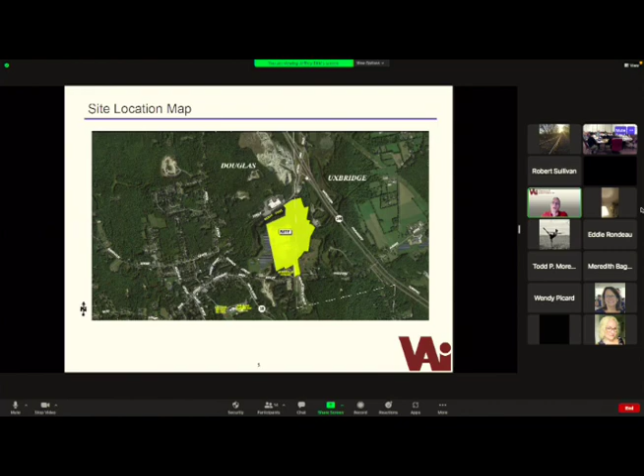This slide shows the study area that we evaluated as a part of the project. So you can see it's basically the Gilboa Street corridor stretching from just a little bit west of North Street all the way through and including the Route 146 interchange. And then the Route 16 corridor stretching from basically Bowen Court here all the way through till it goes into Uxbridge, and then channel into West Hartford Street and then across to 146.

So it's basically the roadways that bound the project sites to the north and south, and then the major intersections that the vehicles associated with the project will travel to the east and west of the project site. As I mentioned, we did measure both traffic volumes and vehicle travel speeds, pedestrian and bicycle activity in the area. Those measurements were done in April and October of 2021.

I described what we had done in terms of the adjustment factors related to COVID. The count station that I mentioned is on 146 in Uxbridge, so it's directly within the study area and certainly is reflective of traffic volumes or changes in traffic volumes and travel patterns that exist in the area. So it's a good location for us to assess any changes that COVID may have resulted in.

So just in terms of some of the statistics that we found as a part of our assessment, focusing on Gilboa Street, today it accommodates about 15,000 vehicles per day, a little bit over that. That's two-way traffic over 24 hours on that roadway itself. The peak hour traffic on that roadway, so in the morning, the peak hour occurs between 8 and 9 in the morning. The volume of traffic is just about 10% of the daily number. It's actually a little bit less, about 1,200 vehicles on the roadway.

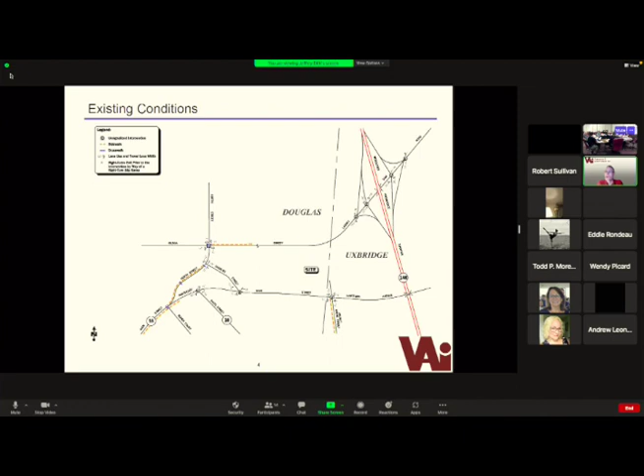So looking at historic traffic growth in both Uxbridge and Douglas, historically the volumes over the past 10 years, COVID aside, have increased by a little over 1.2%. So the growth rate we used was 1.5%, something a little bit higher than what historically has been experienced in the area. So we have those 4 projects that I mentioned, and then that 1.5% growth, compounded annually for a 7-year period. So that's basically taking our existing volumes, adding traffic from those projects, and then growing the volumes 1.5% per year for 7 years. And that's the year 2029 traffic conditions without the project. So that's our no-build condition. So in terms of looking at the project itself, we go the right direction here.

This slide shows the traffic characteristics of the project, and I think you saw this at the last presentation. So just looking at it, as I mentioned, this is based on a non-sortation type warehouse facility. We look at those various types of warehouse, or 4 various types, which is general warehouse, and then we have the fulfillment center, either a sortation or non-sortation, and then we have the Parcel Hub warehouse.

The Parcel Hub warehouse is generally a smaller facility. They're generally somewhere in the 150 to 200,000 square feet. This facility is much larger than that, so it would basically either be a standard cross-dock type of warehouse facility, or it would fall into either a sortation or non-sortation type of fulfillment center.

As we look at the sortation type of fulfillment centers, because you may ask, well, why did you use that facility? Those facilities are generally, the smallest size facilities are about 2 to 3 million square feet, and they range up to about 5 million square feet. They're generally multi-stories. They range anywhere from 3 to 7 stories. And they have a lot of robotics and conveyors in them.

As I mentioned, it's a lot of smaller products that are being picked up on robots, palletized or compartmentalized, and then put on the conveyors and then sent down to be boxed up and shipped out. So the height is to allow for the robotics as well as the conveyors to be put into those facilities. And so those are much larger type of facilities than what's proposed here.

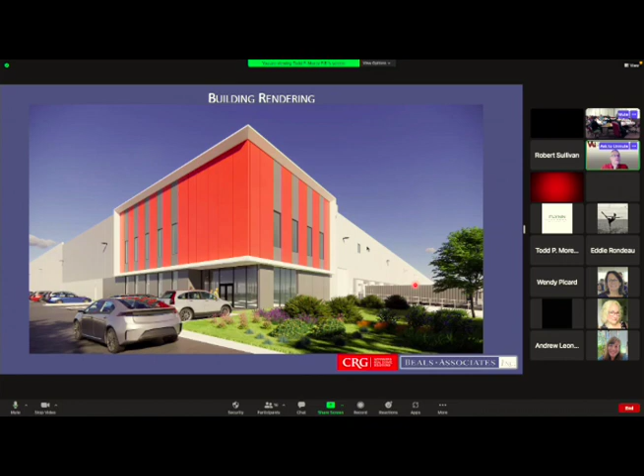So last time, we'd shown a rendering of the building. It wasn't this specific project, it was another CRG project. We went back, they had this one prepared. This is for this specific project. It's the only rendering they've gotten done so far, but this is a corner view of it. Then what they did is they used a computer-generated model to set up the view of the pond.

The only comment I had on this when I first saw it was, you don't actually get that view unless you're probably sitting in a kayak on the edge of that pond. So as you're coming down Gilboa, there's some vegetation, things in front of you. It really doesn't show up here. And just to make everybody aware, when I first looked at it, I didn't see it. So they superimposed this as well.

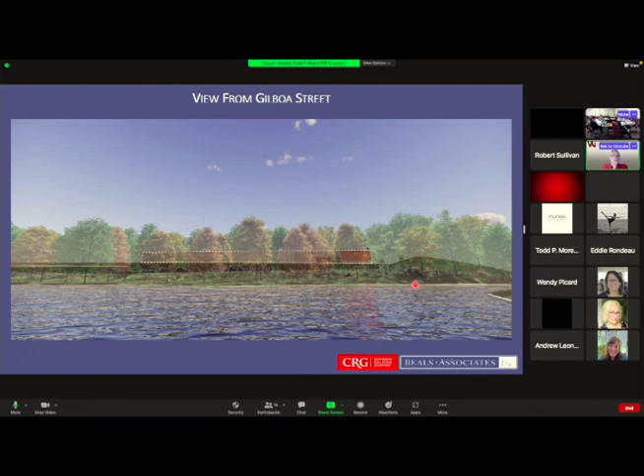So in the background here, you can see the topography, and then this is the building that's sitting down behind that berm. So when you actually look at it, this is a summertime view of what you'll see. You can see the building through the understory on some of these trees through here.

Now, I noticed as I was coming in late this evening that this time of year, obviously the foliage is not on those trees. You will see through those trees, and you will know something's back there. You won't see a clear shot of it because there will be over 100 feet of trees that will remain up on the other side of Gilboa, but you will know something is back there.

The other thing we talked about last time was what about from Northeast Main Street? What are they seeing, what are they hearing, things like that? So we have requested a sound study. The proposal came in this morning. We've executed it. It's going to be a little bit of time before that study's complete. They're thinking probably around the end of April.

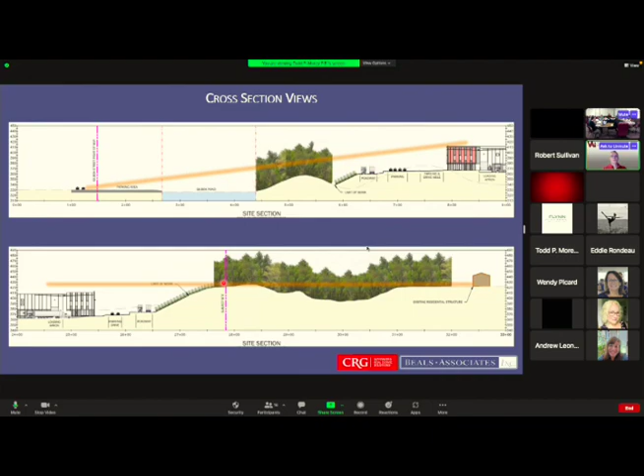To the chair, question. The fact that this is being generally built on a gravel pit, what percentage of the building is not defoliated? Meaning, how much is being built on the sand or the gravel and not taking down forestation? Just on the right over there, some forest? This right here, yeah, that's some tree cutting right there. All the rest of the building is on either gravel or the side slopes that have been grassed. I mean, it couldn't be more fortuitous, to not have to deforest an area completely. It's like 80%, 85% you're putting on the pit? As far as the building goes, I'd say it's more like 95%. 95, as far as the building goes, right?

Yeah, the tree line is up on this edge here, and then it comes down through right there, around that way. All the rest of it, again, is in gravel. Is that the solar farm behind it? Down here? Yeah. So there's already that solar farm, so you don't even see behind the trees, right? From Davis.

Okay, thank you. One last thing, in working with the sound folks, they're going to run their initial calculations, come up with what we have. We've talked to them about running a second set with sound barrier along this edge, and then one from here, about through here. And that really is in response to the valley effect you mentioned of the noise that's coming out of there. So they're going to run a couple of different scenarios for us, see what the difference is. The first run may come back and say there's not going to be any noise coming out of there anyway, just because of the way it sits down in the pit. But in the event there is, that's the second one. That's what we would do there.

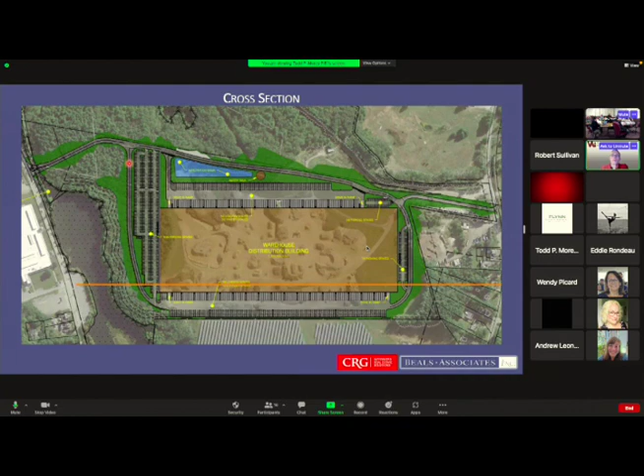This is a public hearing. Anyone in the audience have any questions or concerns? Name and address, please. Yes, I have a few questions. Sure. I live in Gilboa Pond. What's your address and your name? Oh, my name's Barbara. 8688 Gilboa, the big duplex. Okay.

I'm concerned with the exit and entrance out of the facility where you can only take a right. Say you're an employee and you live in Douglas Center, so you have to take a right out of the facility. What are you going to do? Turn around to come back home? So my thought was, why can't you make the emergency exit for employees that want to take a left? Not trucks, just employees. And then with the three-way stop, they need those flashing stop signs, the solar panel. And I was thinking, you know how you go straight instead of taking a left over Charles Street Bridge? They could make that a one-way, so trucks can't come this way, from here to where you take a left.

You can only go up towards, you know, the church or whatever, but you can't come down. That would alleviate trucks cutting over and trying to sneak through and avoiding the center. You know what I mean? Right? Yep. Was that it? That's a question. Yeah, one more, if you could do that. I'm just brainstorming. I've been there for 25 years.

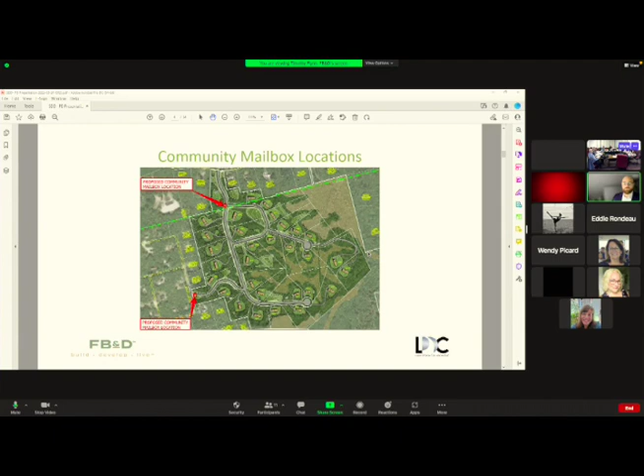Thanks very much. Nice being here this evening. Happy to stop if there are any questions along the way. I'll try to move this along. We can go to the next slide.

So what we're going to do is really try to address some of the concerns that were stated by residents related to the development, specifically the fact that there are going to be private wells, there are going to be new septic systems, and the concern about construction potentially interacting with some of the springs in the area. So we'll get into that. We can go to the next slide.

So the objectives of the study were to, number one, look at the adequacy of the aquifer, the bedrock aquifer, which supplies all of the water currently to the surrounding areas. Second, looking at whether or not the additional withdrawal of groundwater for the new homes would adversely impact some of the existing neighboring properties. Looking at whether or not construction activities might negatively impact some of the area and some of the underground springs, and also looking at during construction whether you might get a breakout, which could be a concern and could result in some adverse impact on springs. Next slide, please.

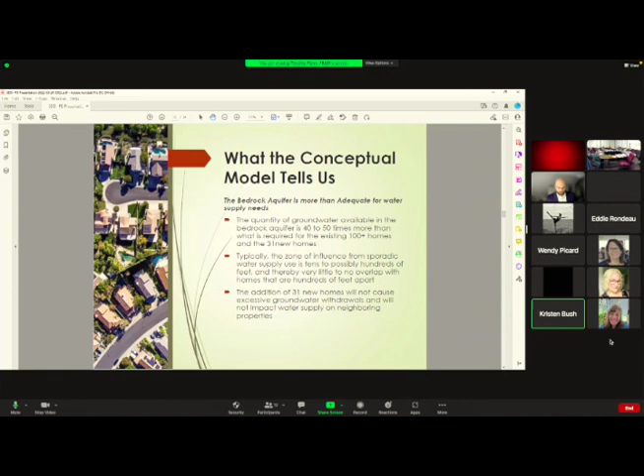Right, so if you could kind of touch on the concerns from the abutters. Yes. And I don't know if that's coming up. Yes, it is. We can go to the next slide, please. So here we try to talk about what some of those concerns are. We'll get to the groundwater next, but first we addressed the septic systems. There was a concern about the new septic systems contaminating the water supply.

So the perc tests were done, and what we found was that the material, once again, is very sandy loam, which is relatively ideal because it provides a good environment for the bacteria to do their job, to decompose the waste. If it was a very tight soil, sometimes you don't have enough transport of oxygen and/or water, so things become too stagnant. So it's a relatively ideal condition. Now there are some places in the development where the material might be thin. So LDC and the other engineers are going to have to look at each property and decide whether there's adequate cover for the septic system. Some places it's up to 15 or 20 feet thick, which is plenty.

So the water supply for each household is going to come from 200 to 400 feet in depth, and it has no connection to the superficial materials. In other words, you have a septic system up in the soils, you have water being withdrawn from 200, 300, 400 feet down, and there really is no direct connection. That water is coming from a large geographic area.

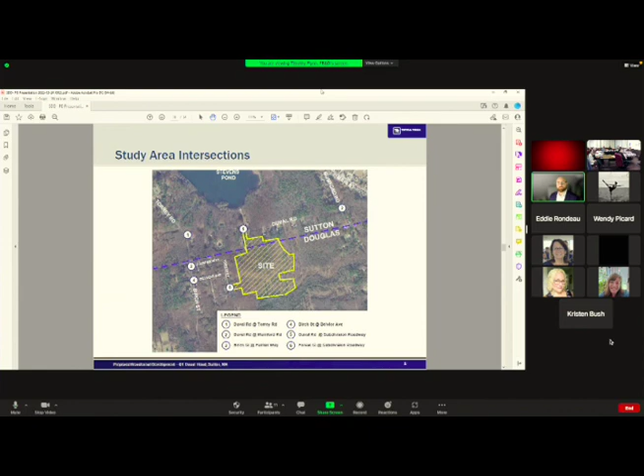Okay, the important traffic. Yes. For the record, I'm Courtney Seagock from Tetra Tech, 100 Nickerson Road in Marlborough. Tim, can you go to the next slide, please? So we prepared a detailed traffic impact and access study for the project. We included a comprehensive set of intersections in our study area. As you can see from this graphic, we looked at 6 intersections, 4 existing intersections, and the 2 proposed subdivision roadway intersections. Next slide. As part of the study, we collected traffic volumes.

These volumes were collected in July of 2021 when most of the travel restrictions were lifted, and they were also done during a summer condition, which is typically peak traffic volume conditions. We collected during the 7 to 9 a.m. peak period and the 4 to 6 p.m. peak period. That's industry standard for residential projects because that's typically when people are leaving for work and coming home from work. So as you can see, there's very light traffic volumes at these intersections.

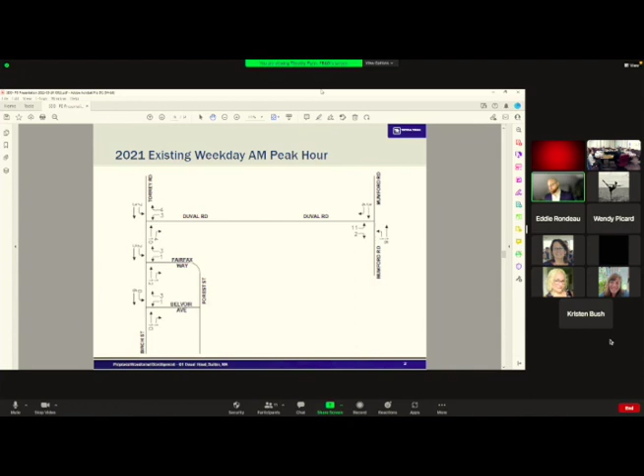During the morning peak hour, there's generally less than 50 vehicles per hour at the intersections as a whole. So these are very low volume roadways, which per AASHTO standards are roads that carry less than 400 vehicles per day. So next slide.

During the PM peak hour, you can see it's very similar to the AM, no more than 50 vehicles per hour for the entire intersection volumes. And next slide.

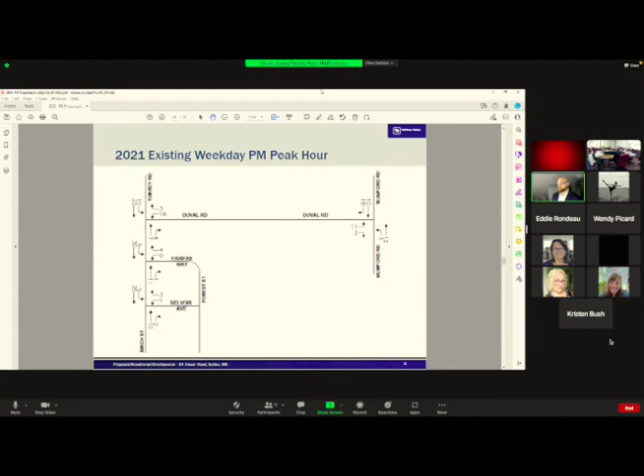Once we have the existing traffic volumes as a base, we then can look at the future year conditions. So the future year conditions per MassDOT standards, which is more than the nationwide industry standard of 5 years, is DOT likes us to use a 7-year traffic growth. So basically, we developed a traffic volume growth percentage, which we based off of historical DOT volumes in the region, and we also compared it to other traffic studies that have been prepared for larger projects that were nearby, and we used a 2% per year growth rate.

Those become the base volumes for the no build, and we did contact both the towns of Sutton and the town of Douglas to add on top of that general background growth rate any specific development projects that are planned or approved in the region.

Then we look at our project's traffic volumes, and we apply them to the roadway network based on U.S. Census Journey to Work data for the town of Douglas. So that's specifically data from your community that has been summarized by the U.S. Census data. So this is specific to your locality, and we have about 50% of trips that will come to or from Mumford Road from the north. It was a negligible amount that would come to or from the south of Mumford Road. 30% would come to or from Torrey Road, and 20% come to or from Birch Street.

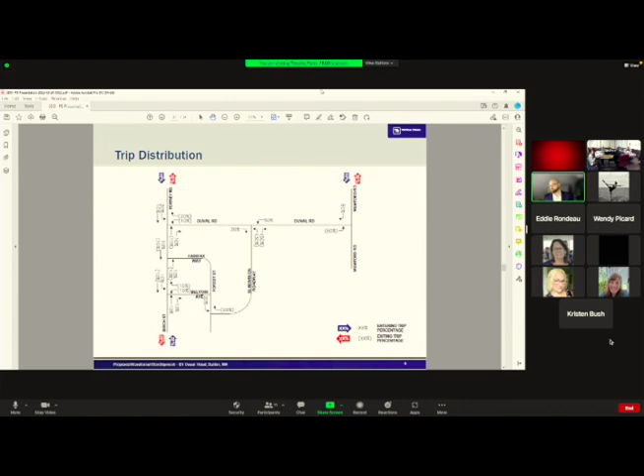Now, because there's two different connections for the neighborhood to the adjacent public roadway system, we then looked at the proposed layout for where all of the houses would be and came up with a distribution. So approximately 80% of the homes would use Duval Road, and 20% would access via Forest Street. Next slide, please.

So we developed the trip generation estimates for the projects, and we used industry standard trip rates published by the Institute of Transportation Engineers. That's the gold standard for estimating trips for most land uses, and single-family homes is one of the land uses that ITE has the most data points for. So everyone, pretty much when they're doing a traffic study for single-family homes, will use this data. And as you can see, during the morning peak hour, we estimate that the 31 homes will generate 23 vehicle trips. That's 6 entering trips and 17 exiting trips.

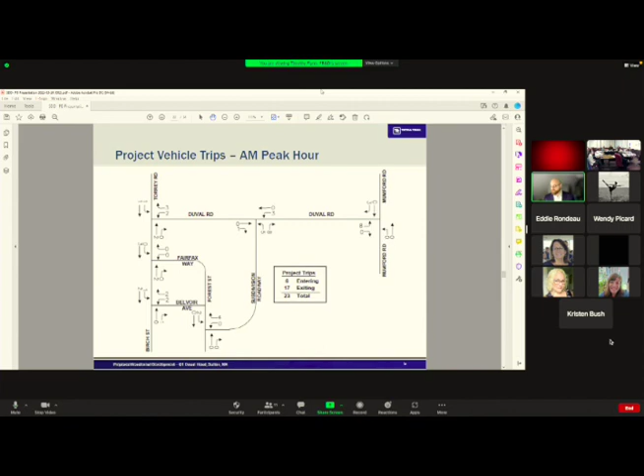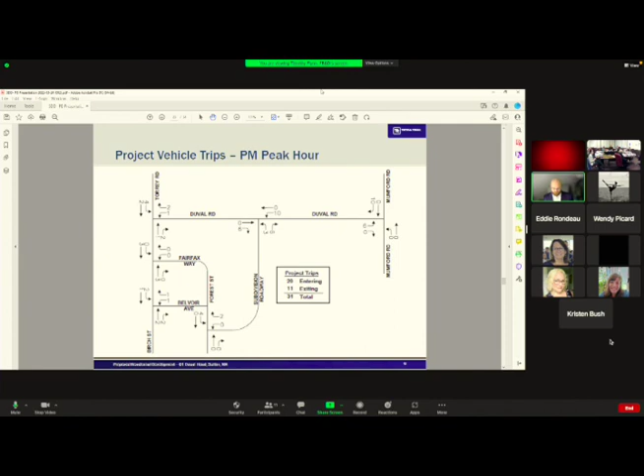Next slide, please. During the PM peak hour, there'll be about 31 trips. 20 will be coming in and 11 will be going out. So basically, this area will see an extra vehicle every approximately 2 or 3 minutes due to the project. And again, these trips are split between Duval Road and Forest Street to minimize the impacts to any one location.

Next slide, please. So then we added those to our future year base volumes. And as you can see, the volumes are still very low. So there's still less than 50 vehicles per hour during the AM. And next slide, please. And the same thing with the PM. Next slide. So this is a summary of the AM peak hour, PM peak hour, and weekday daily trip generation. As you can see, during the entire day, there will be 294 trips. And again, those will be split between Duval Road and the access on Forest Street. Next slide, please.

So then what we did is we conducted capacity analyses, which are looking at the intersection operations for delays. And we used Synchro software, which is industry standard capacity analysis software based on Highway Capacity Manual methodologies. And levels of service A through F are the designations that you can get. Just like grades, A is the best you can get, F is the most delay. So most communities consider LOS D or better. In the greater Boston area, even LOS E or better is okay, given that greater Boston out to Worcester is kind of more populated.

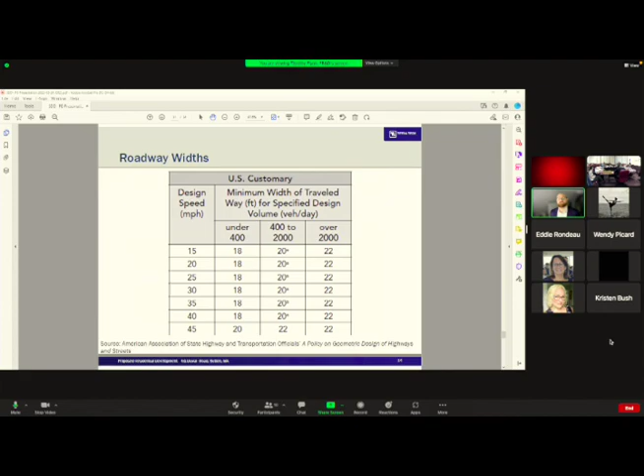So, question to the chair. Your traffic study was based off of July of 2021. Did you add in the COVID factor to those numbers, which is supposed to be 30%? Or 11%. I think that was 30. So for this part of the state, during the week the counts were conducted, we used the MassDOT COVID dashboard, and the traffic volumes are within 10% of what they were in 2019 for the same week. So we didn't apply one here, but we could.

But the volumes are so low that even if we applied 30%, it still wouldn't bring you into even LOS B operations, because the existing volumes are so low to begin with. I get what you're saying with the 18-foot width, because you've got 40-foot trucks and you're trying to maintain a lower speed on the roadway. I don't think we've approved a road width of 18. But I see your logic behind it. 20. Yes, but I think what they designed is.

So basically, all we were looking to do here, Madam Chair, was just to demonstrate that the road widths being proposed more than satisfy the AASHTO requirements. Yeah, I appreciate that. These are absolute minimums. And so, yeah, they're several feet above that. So there should be a comfort level for drivers passing each other.

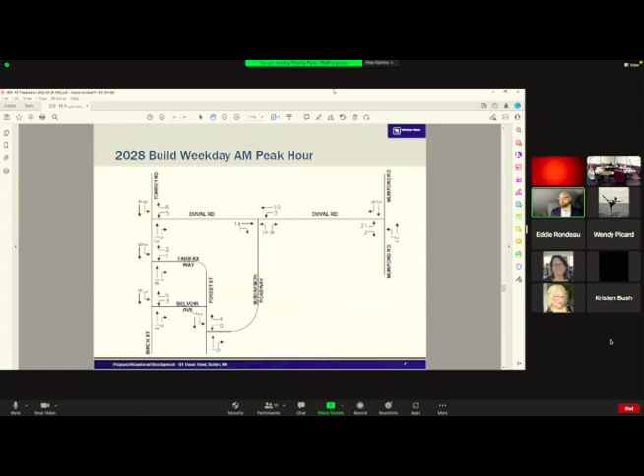So you can see in the peak hour, there's going to be 6 extra trips due to the project through that neighborhood. Scroll to the PM peak. Oh, yeah, 6 in both. So 6 in both, I'm sorry. So that's about 1 extra car every 10 minutes. So I wouldn't consider that enough to have an impact on travel conditions on Forest Street. Yeah, so we would want to take a little bit of a closer look at the impacts, especially on Forest, but you'll hear from the abutters, their concerns.

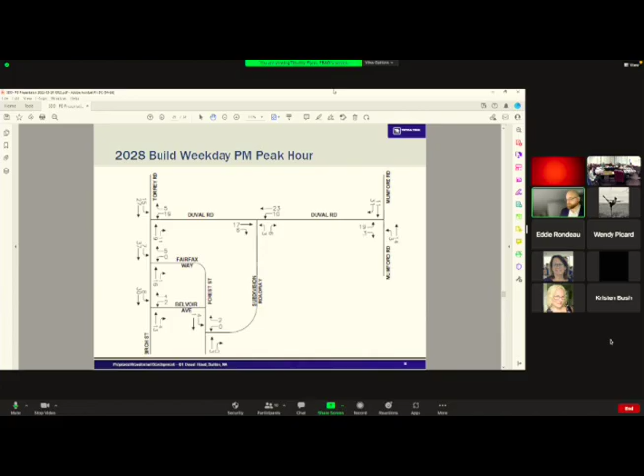Sure. Board, anyone else have any questions, traffic questions? Mr. Zwick? To the chair. If I may ask, so what's your actual, I'm going to go first. Okay, all right. What's the actual road width that you're going to be having? Madam Chair, we're looking at the main access drive at 24 feet. In Road B and Road C being the loop road and the cul-de-sac, we're proposing that at 22 feet, if the board would entertain that. Okay. What about Road D?

Road D, that's a good question, Madam Chair. We had initially looked at a 22-foot up in there. However, based on the input that we received by the public safety officials, it was their preference that be 24 feet. I did indicate to them that looking at the road widths in the Forest Street subdivision, they do vary between 17 and 19 feet. I did find a couple areas where it was 20 feet plus. However, recognizing the narrowness of those roads up there, we said that perhaps a 24-foot would work to give them the proper turning radii to go on and off the streets. Okay, makes sense. Thank you.

So through the chair, I still would like to see 24 throughout. With the delivery trucks, everything that's going on today, everybody wants everything brought to their house. Because in the wintertime, and I respect your numbers, but when there's snow on the ground, your road shrinks. Ernie, you plow the roads all the time, you know it. And you're not talking inches, you're talking feet. They shrink. So I don't care how wide you say you're gonna plow, nobody with a plow is gonna go kiss a curb, rip the plow apart, so the roads are gonna be narrower all winter long.